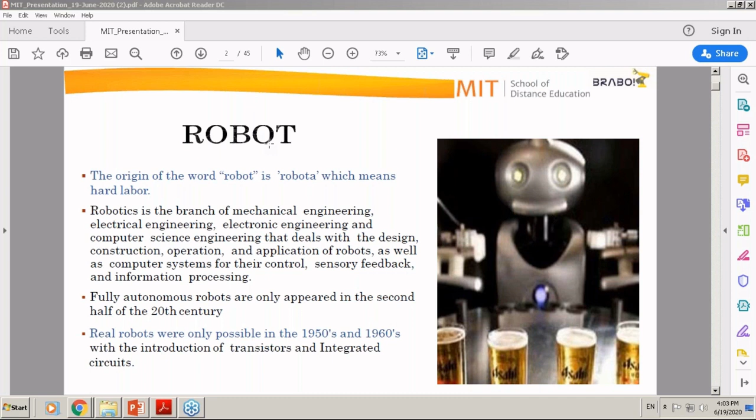If you compare the robot and humans, the features of a human being are manipulation, vision, smell, taste, feel, communication, and thinking capacity. More or less all these features are covered by the robot, except two areas where research is still going on. In some areas we have achieved success, like smell and taste, but these are not launched in the market in a big way. However, areas like manipulation - we have fingers and legs for manipulation of the whole body, and for the robot these are motors and other forms of actuators.

Vision is camera for the robot and eyes for the human. Smell is nose for humans, and research is going on for robots - there are certain robots developed recently in Japan that can smell different fruits and juices. Taste is like a tongue for the human being, but that is still not implemented in robotics. Feel is skin - the robot has tactile sensors for this. Communication - we have nerves, whereas the robot has wires, fiber optics, and radio. And thinking capacity - we have a brain, and the most important thing in the robot is that the brain of the robot is the controller, which is computers and microprocessors.

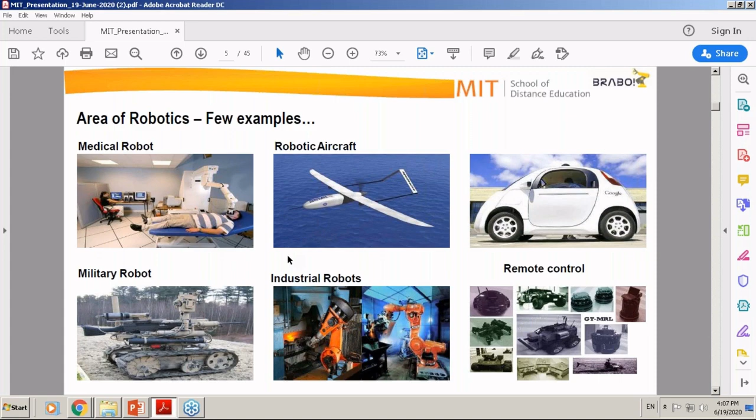So why is automation required? If you see automation, there are many things involved. A lot of people are losing their lives, they become disabled. So why is automation required, and what is the necessity, and what benefits do we get from it?

The most important thing is accuracy, quality and productivity. Today we have a lot of productivity issues in many areas, many industries. So if I want to improve productivity, we need consistency, accuracy and better quality. Then process monitoring is extremely important, because at the end of the day we need to find out how I am using my time or the industry's time.

So if process time is extremely important, then it should be less labor dependent. You can see the current situation, what is happening - we are losing a lot of impact on the economy because we don't have the industries running, because we don't have automation, scalability and flexibility. This is one of the very important aspects.

Because without flexibility, people don't like to have the same equipment or product again and again. They want multiple products in a shorter time. So what can we do? We cannot, for example, in Tata Motors have an Indica line - we cannot keep the Indica model for a long time. We need to have a different model in the shortest time. So flexibility is extremely important.

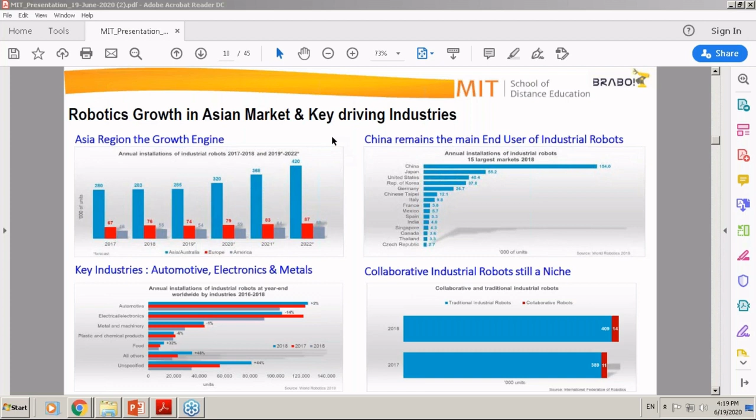Technological development is expanding robotic adoption. Today we have more intelligent components like smart grippers. The smart gripper is one of the new innovations created, which is an extended arm of the robot, and it can be used for multiple applications.

Then there's greater connectivity, like plug and play interfaces and cloud computing. These better connectivities are giving a lot of opportunity for robotics, making it easier to use today. Most of the time you don't need separate programming and coding. You can run the robot by offline programming. Sometimes you just drag the robot arm and bring it to a particular point, or take the hands of the robot and move it yourself, and all the programming happens automatically. So this is today's condition.

So what is going to happen for tomorrow? Tomorrow it will basically be learning by trial and error. You show the activities, and the robot captures that through a vision system, and the programming can be done that way. There is also self-optimization: you may have taken a long path for programming, but the robot can automatically do self-optimization through computing.

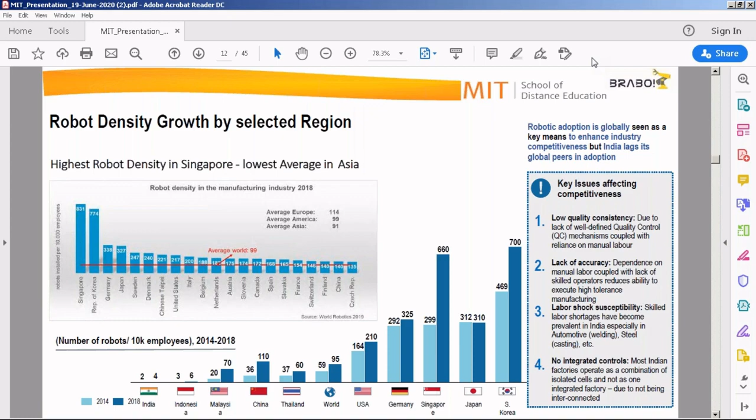So short term, because of this current situation and the last year's market, there's been a very short term volatility, but the future for the robots is going to be very, very bright.

Today, the automotive industries are going through a different phase. Earlier, we had internal combustion engines, now it is going for electrical vehicles. So the whole scenario, whole structure is getting changed. That is why the industry is going through that phase.

And there's also declining smartphone sales. Political headwinds are also there. So considering all these things, there's an issue, a temporary issue to reduce the number of robots, and the volumes has been drastically reduced in the last year. And there could be some issue this year because of the COVID situation.

However, tomorrow there will be a lot of flexibility required in the manufacturing. That is why, as I earlier mentioned, people are looking for continuous change. Whether you take a mobile, a car, or any other product, you need to have a different product. Everybody would like to have unique features in a particular product. So flexibility is extremely important.

Then demographic time bomb is also important. Emerging and rapidly growing market segments, and business and technological innovation. For example, MSME people would like to increase their productivity with less manpower, with additional better quality, to compete with world class quality.

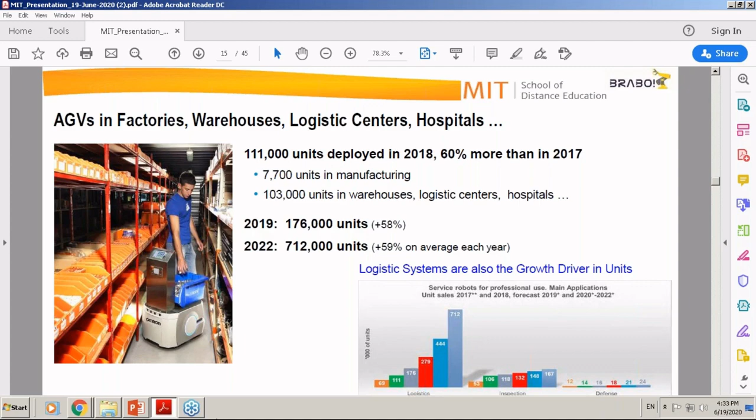In India, you must have heard that a lot of robots are coming in, even for knee operations or other medical activities happening in India in the medical robot space.

These are the areas which I personally feel are going to rise in a big way - medical and agriculture, especially in India, are going to grow significantly. The only thing is that we need a lot of innovation in the agriculture area.

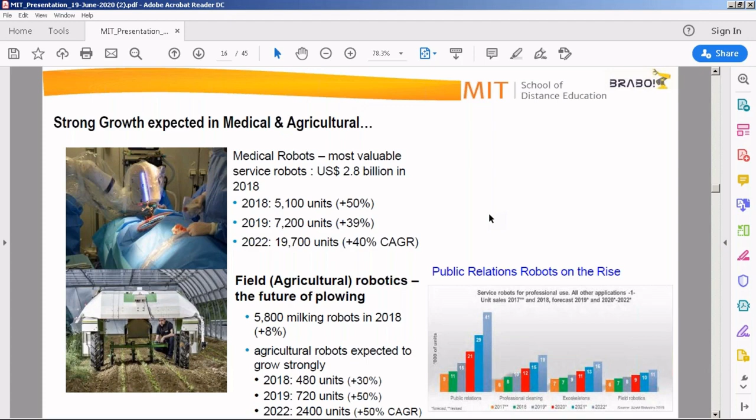There's a very thin line between industrial robots and service robots. We spoke about industrial robots, the numbers, how the market is increasing, and as far as service robots are concerned, how they can be used and what the numbers are.

Service robots - you must have seen some videos recently of them being used in hotels for serving tea and coffee, whereas industrial robots are already used across different kinds of industries, from small industries to OEMs. Depending on application, the same unit could be used as an industrial robot or a service robot, or vice versa.

But the main thing is that when you use the robot in different areas, there are certain norms, but these norms can certainly be changed, and the industrial robot can be used as a service robot. There's a concept change happening, new applications are emerging - for example, how can I use the robot

with the operator, or how can the robot assist anybody for servicing, whether it's safety, security, or even doing some hoteling work. All these things, the robot can work together with operators or any person. The only thing is we need to change the concept.

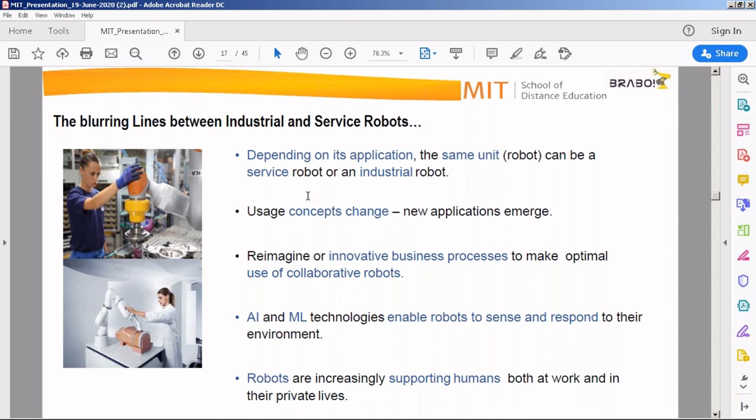Now, coming to Brabo robotics and automation, let me give my background. I started my career as a GET in Telco in 1991.

After joining Telco, I always felt that automation should be required, because everything was done by operators and there were a lot of pains for them. People had back pain, sparks came to their eyes during welding, and there were many injuries. It was an inhuman operation happening not only in the weld shop but also in the press shop. I've seen in certain small scale industries operators losing fingers. These were the reasons I thought we should look for automation in this sector.

When I started my career, the first robotic line was the Safari line, and subsequently I was selected for the Indica line, which we built from scratch. We made the first Indica line with a capacity of 110 robots in one body shop, with a cycle time of 105 seconds. So one car was rolled out in under 2 minutes. That was huge automation, and we could even achieve a cycle time lesser than 105 seconds.

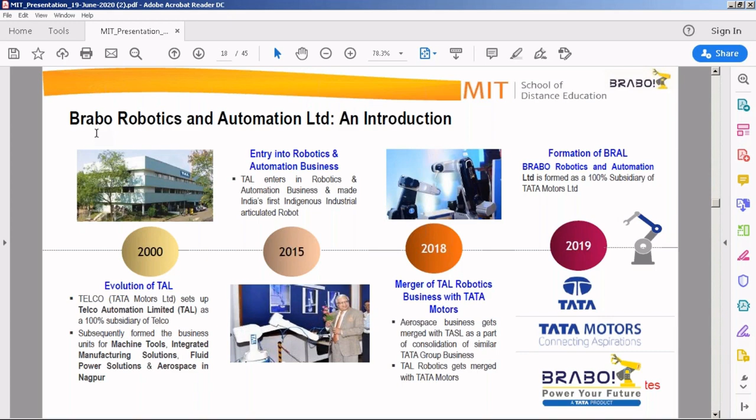So why did we launch this robot? Because when we were talking to tier 1, tier 2 suppliers, we realized what their pain areas were. When we made the Indigo and subsequent models, our line had excellent capacity and a lot of automation, but the people supplying components to that line did not have so much automation.

So when we went and spoke to them, why can't you have automation? Their main pain area was spare part availability. Even if I take a robot, in those days nobody in India was manufacturing robots or had much knowledge in robotics, in 95, 96. So whenever they got a robot, they had to get it from Japan, Germany, or Europe. In that case, the pain area was availability of spares.

If something goes wrong with the robot, who will pay? First is of course the initial cost, but if companies are ready to pay that, the second most important point was availability of spares. Then how to use the robot, because different programming skill sets were required, and though there were colleges, they did not teach that kind of robotics programming. So the skill sets were not available.

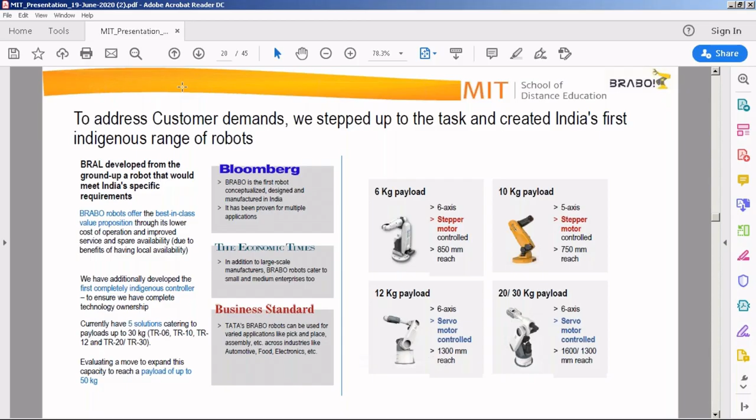So the journey, as I said, we started from 2014. We created the first prototype in our company. We developed it further in 2015, creating a completely indigenous controller, and in 2016 we showcased that in Make in India. In 2016 we also got the required certifications to sell this robot within India and outside India - CE and IP certification. In 2017 we launched the robot in 6 kg and 10 kg.

In March 2018 we were also awarded the Excellence Quality Brand Award, and in 2019 we launched 12 kg to 30 kg - 12, 20 and 30 kg payload capacity - with a servo drive.

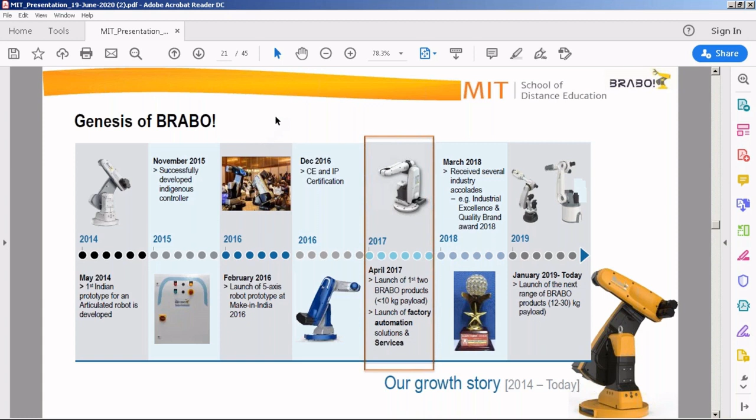In the factory automation solutions, because nobody will buy just a robot alone, they would like to take the solution along with the robots. So we always give the complete turnkey solution to the customer.

So if you see our offerings, basically it's our own robot, and we also provide bought-out items sometimes, like AGVs, which we don't manufacture. We bring it together and do the complete integration with our robot, or sometimes if robots other than ours are required, due to payload capacity needs, other make robots need to be used. We buy that and then integrate the whole thing together.

But we normally give the complete turnkey solution right from the layout till implementation, usage, and training to the operators in the industry. This is based on our earlier experience, right from the beginning - almost 40 years of experience within the Tata Group.

Because Tata Motors used to make everything in-house in the beginning, and when TAL was formed, we used to give solutions to industries other than the Tata Group as well. So that experience we had, and based on that we created the robot.

Then we created the integration. We can still integrate all different kinds of equipment together, and we have created different applications, including assembly, testing, handling, machine tending or press tending, inspection, deburring, transfer systems, and ASRS. We have gone through all these activities, and now we are giving solutions to different industries - not only the automobile industry, but across different industries in India.

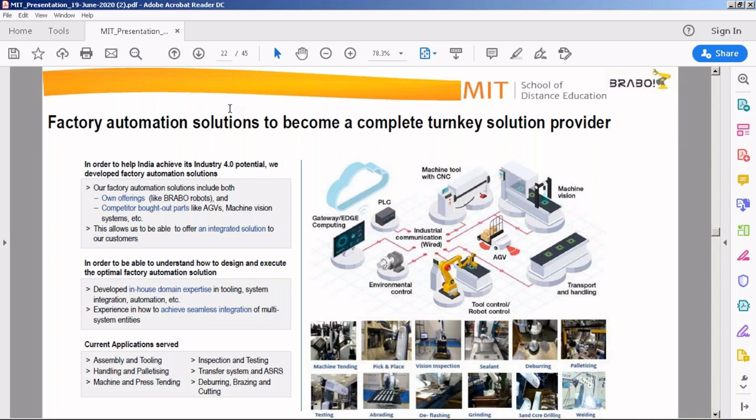So for factory automation solutions, you can see some of the pictures of what we have provided as of today - the robotic manufacturing line, complete integration for the automobile industry, and for general industry we also handle different kinds of big handling equipment, also for railways and aerospace. We also created jigs and fixtures required for automation, mainly for railways.

There's a bogie, or complete aircraft - different parts of the aircraft tooling. We also give complete fixtures for bus manufacturing, and there's a lot of other general equipment. General industries require different kinds of jigs and fixtures that we supply, and now we've started supplying these not only to the Indian market but outside India as well.

Then there's material handling, which was our earlier captive division, continuing from our earlier experience. But most of these things we currently don't do ourselves - we have offloaded this job to other vendors who do the work, and we only do the assembly and integration currently.

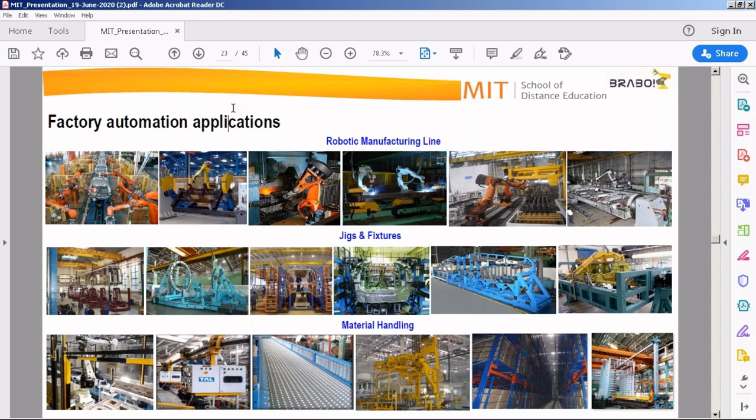Our business model has three pillars. The first pillar is our own robotics and application, which is our own robots, whatever we develop. The second pillar is factory automation and smart manufacturing, where we integrate different fixtures, different robots, different equipment. We also have IoT, artificial intelligence, machine learning, and deep learning, all of which come into factory automation.

Finally, we have service, AMC, and spares. We have taken certain factories and we are running them. For example, in the Modern Coach Factory in Raebareli, they produce bogies for the railways. They had almost 10 robots in a line, but they didn't know how to install, commission, or handle those robots. So we installed and refurbished that line completely. Now we manufacture 4 bogies per shift, two shifts a day, so eight bogies per day, and we get paid based on how much we produce per month. So this is a pay-on-production model that we are running.

Apart from that, we have AMC, where we have supplied the robot and complete equipment, and our job is to give them continuing services. Spare parts is also a separate division within the company where we supply all the spares for all the equipment.

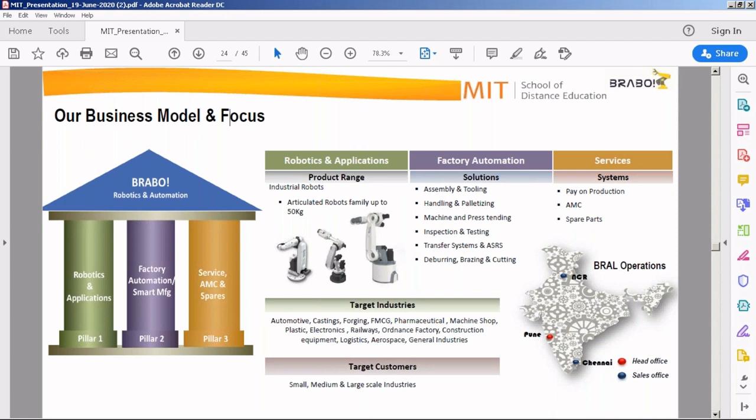Our aim is to go big and do a lot of R&D for new products. Our idea is how to create new products while also optimizing current products and entering new segments. For example, we are currently working on gantry systems, which could be cantilever gantry or area gantry. There's also AGV or AMR, the auto-guided vehicle or autonomous mobile robot, which we are working on. ASRS, Delta robot, and Scara robot — this is our current focus.

We have a good shop floor and R&D sector where we upgrade current robotics, for example controllers. We are the only company developing the ROS robotic operating system in India, and the team is working on that. We are also creating a lot of IoT and artificial intelligence solutions in R&D with existing products. Finally, we want to serve not only industries but also go forward into service industries as well.

Apart from that, we collaborate with and support startup companies. There are engineers who pass out from colleges, schools, and institutes and start their own companies with their own ideas. One such startup is called Bandicoot Scavenging Robot, a very interesting company started by young students in Kerala. They wanted an industrial partner, so we partnered with them. They had done the design, but we optimized it and gave them our experience, and together we created this robot, which we now manufacture for them.

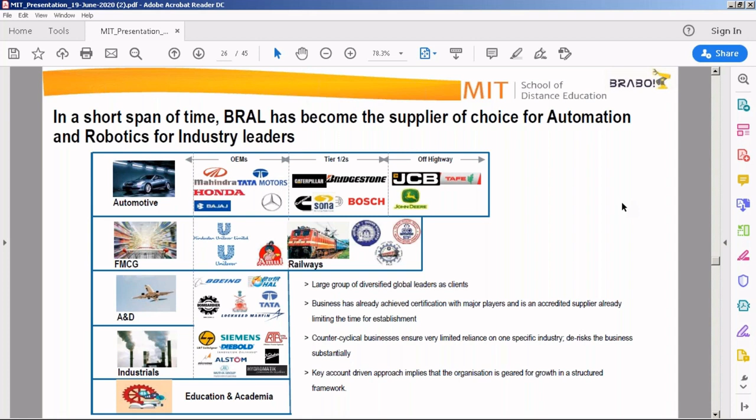We also received quite prestigious awards. Starting from 2015, we got a Best Technology Award. In 2016 we got the Make in India Award. In 2018 we got the Quality Brand Award. And the most prestigious award - we feel proud that our name has been included in the 30 Robots to Watch list by IFR, the International Federation of Robotics. That's one of the very proud moments for the entire team. In 2018 we also received the Industrial Excellence Award and the Best Product Innovation Award from Machine Tools.

Another prestigious award we are very proud to receive is the Tata Innovista Award, which is a big competition across all the Tata Group industries worldwide, and we were awarded Best Product Innovation Award. At Automation Expo we again received the Make in India Award, and finally the ASSOCHAM Emerging Technology Award. These awards have really given a big boost to the entire team, which is a very young team.

We have almost 100 employees in total, and the average age is only 28. So you can imagine we have a very young team, and we also have good gender diversity, almost 30 to 35%. Girls are working from the sales department up to the production area - they are across all divisions, and they are giving a lot of support to develop this Brabo robotics and automation.

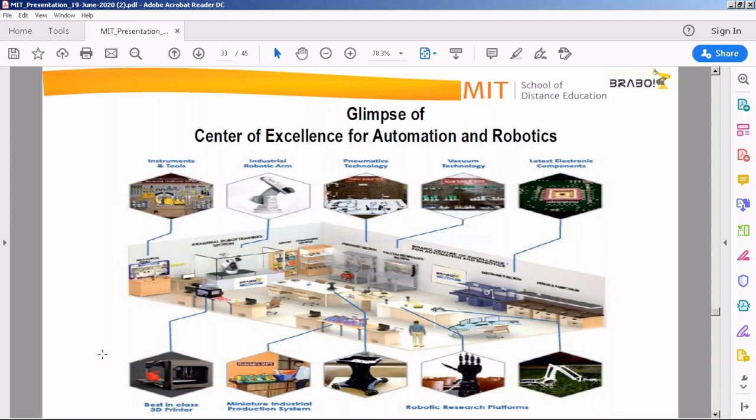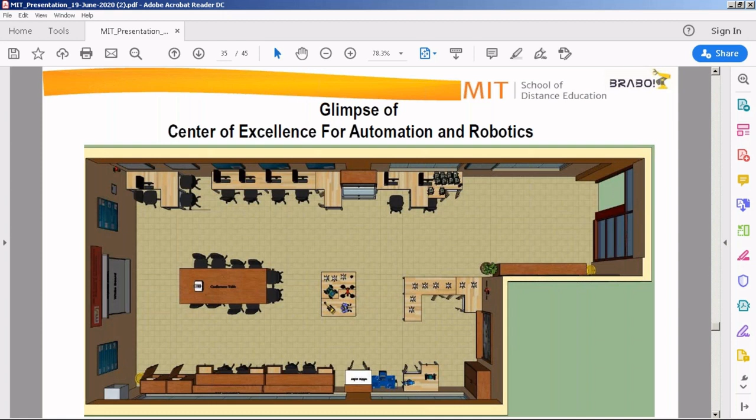The educational options, as I said, include option one, which we call a mobile cart. It has a robot on the cart which can move from one place to another, because our robot works directly on single-phase power and can start immediately, plug and play. It has pick and place, path tracing, and color sensing applications. We also have vision-based software that can be installed, and we give problem statements to students so they can work on different applications.

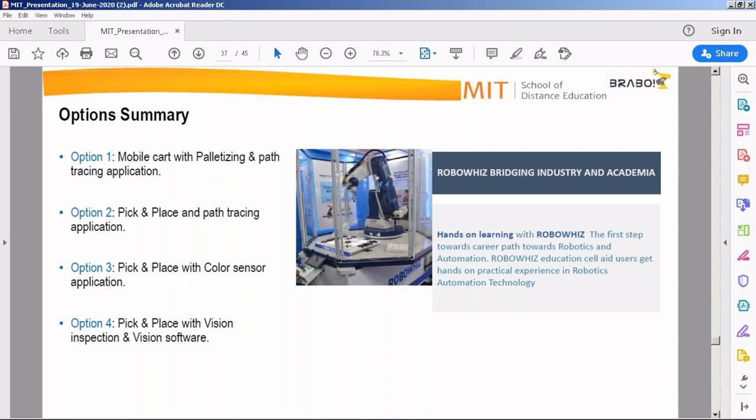This is RoboWhiz, option one, where we use a 10 kg payload capacity with controller and teach pendant, a cart chassis with gripper assembly, palletizing and path tracing application, and system integration with installation and commissioning. This covers option one, and it is a very popular option in most engineering colleges.

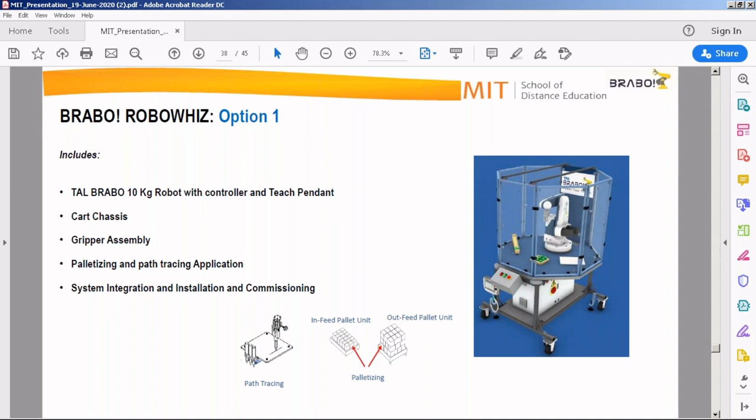Option two is more or less the same, but uses a 10 kg payload capacity with the teach pendant controller. A gripper unit is there, plus a ball matrix and whiteboard marker unit, so it can be used for different applications. In this particular option, a pick and place and path tracing application with system integration has been considered.

Of course, each option can be changed if the colleges or students want. This is just basic knowledge given in this area.

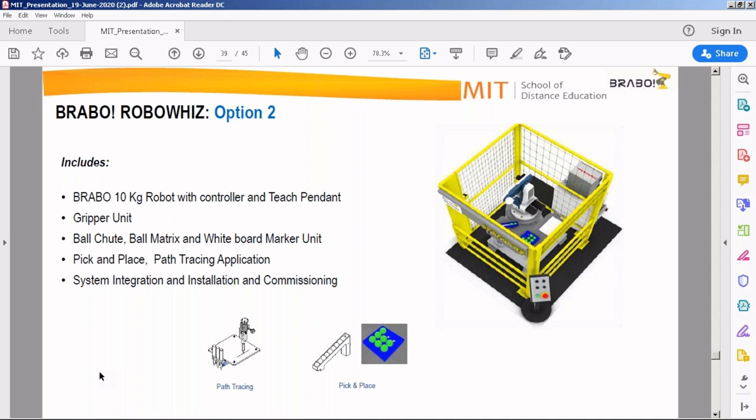Option 3 has another setup with a color sensor, light source, sorting basket assembly, wireless LAN router, and pick and place application with color sensor. These are different compared to the other two options, so this option is also available, and we can mix and match options to create another configuration.

Currently, these are our standard options which we normally give to institutes, whether engineering colleges or universities. Sometimes private companies or small scale companies setting up training cells also buy such models or options.

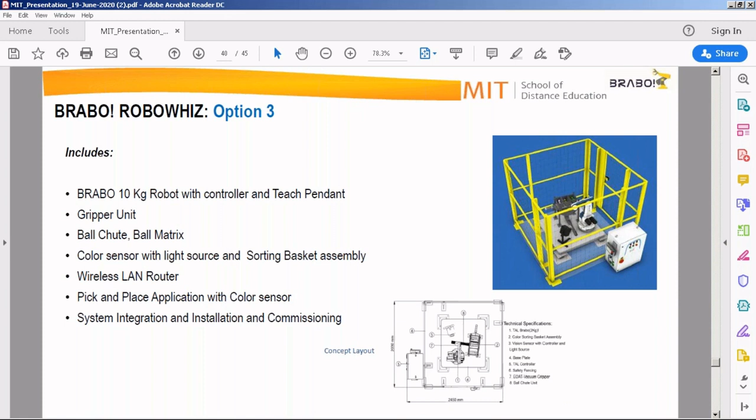Here again, similar to that, there's a color sorting basket assembly, and a vision sensor with lenses and vision software, so we can place an inspection application. This is what we cover in this particular application.

You can also use this for entertainment purposes with this kind of robot. The idea is that we have created different applications and ways to integrate different equipment along with the robot. If somebody wants all the applications in one, that could also be possible, depending on the requirement of that particular institute.

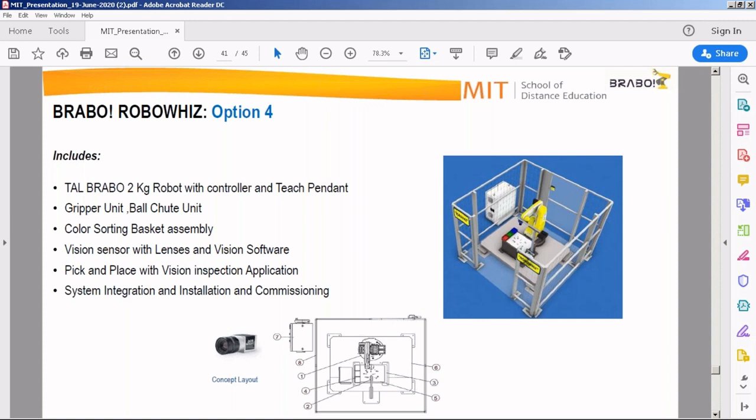The specifications of the robot: as I mentioned, 10 kg payload, 750 millimeter reach, 5 number of axes. The robot weight itself is 95 kg with an articulated arm, and repeatability is almost 200 microns. It can be mounted on the floor or on the ceiling, and can run up to 50 degrees centigrade.

It has digital I/O, with spare digital I/O also available as an input-output card, and the controller weight is almost 45 kg. So this standard robot is used for each and every option.

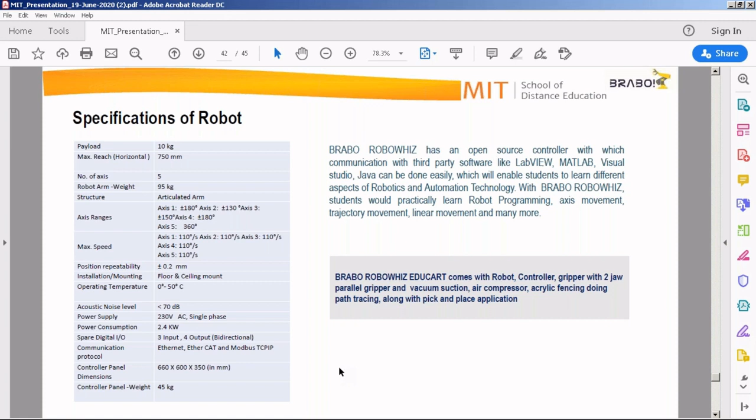We also provide MATLAB and other things as required by the institute. We have this center of excellence and other benefits, like giving complete technical knowledge, information, and guidance to the faculties, and we set up the complete line in the robotics and automation lab.

We provide 1-year technical assistance continuously available, and we sign up with industries and academia for a continuous ongoing relation, giving support as much as the industry requires. We also give problem statements to students, and if required, can conduct tests for students in case colleges are interested.

There's also a lot of expert guidance, and we give information about what's happening in the country and outside India in the robotics field. We can also give free lectures to students and those interested in the robotics area.